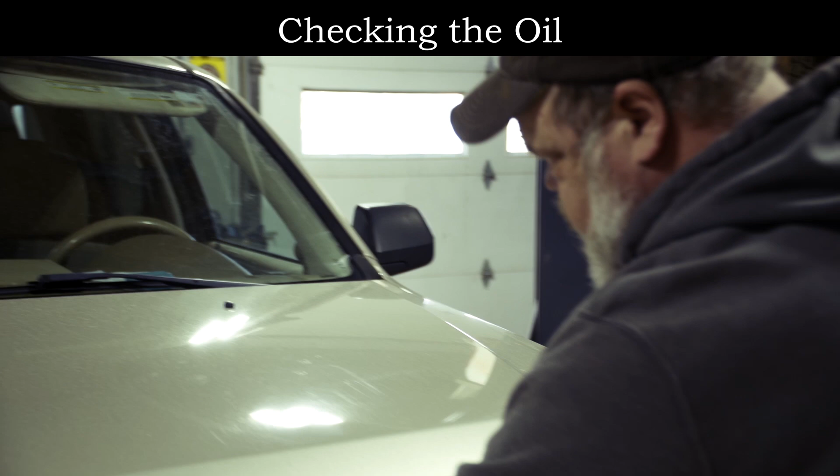Today we're going to check fluids on the vehicle. We're going to check engine oil, transmission fluid, brake fluid, antifreeze, and check the air in the tires. Then we'll go from there. Once you pop the hood release, underneath the hood they all have a release, so you can get the hood open and use the prop rod.

This is a 4-cylinder Ford, and almost all dipsticks have a yellow top. You look under the hood and most of them are yellow. Give it a good wipe, put it back in, pull it out a second time, and then you can read the oil level. This one here is just about on full, so engine oil is good in this car.

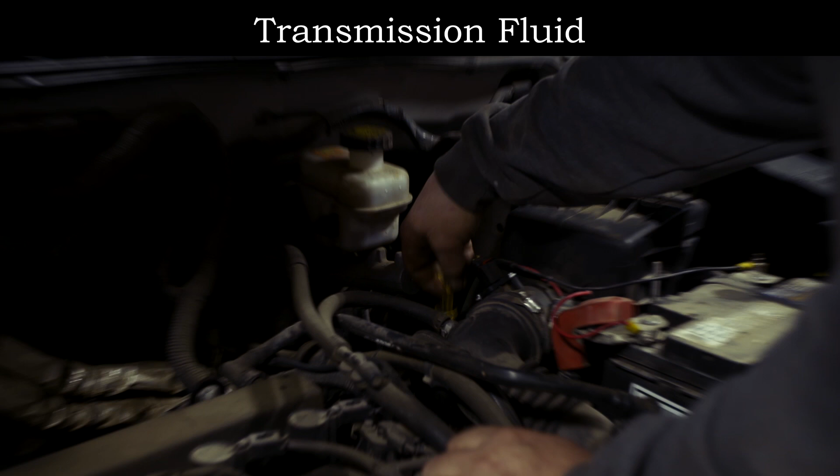Over here under another cap is washer fluid. They're always located under the hood. Back here will be your transmission fluid, on the driver's side towards the rear. Same idea, you pull it out and wipe it off. Most transmissions you have to have the car running when you check them, and you always dip it twice: first time to wipe it, second time to check it. You can see this one here is on the add mark, so we'll probably put some oil in that one.

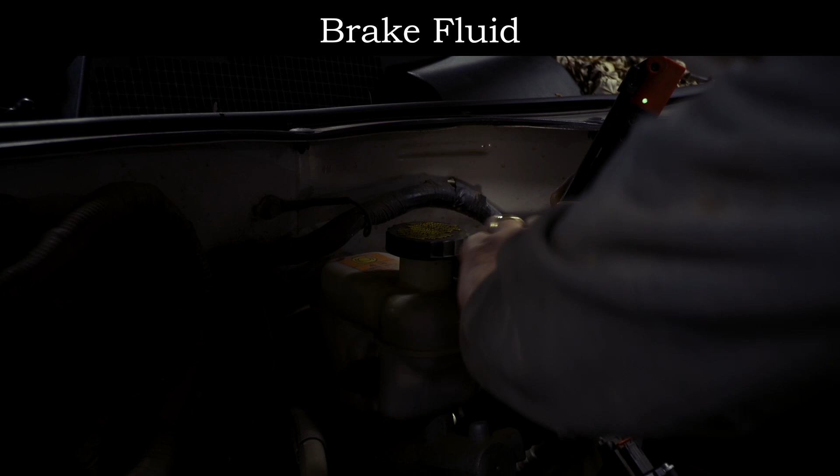With a tall reservoir on the back by the firewall, this is brake fluid. Most of the time you can see right through them, and with a little wiggle you can see that the fluid is right there, just on the full mark. That takes DOT 3 brake fluid on 99% of cars.

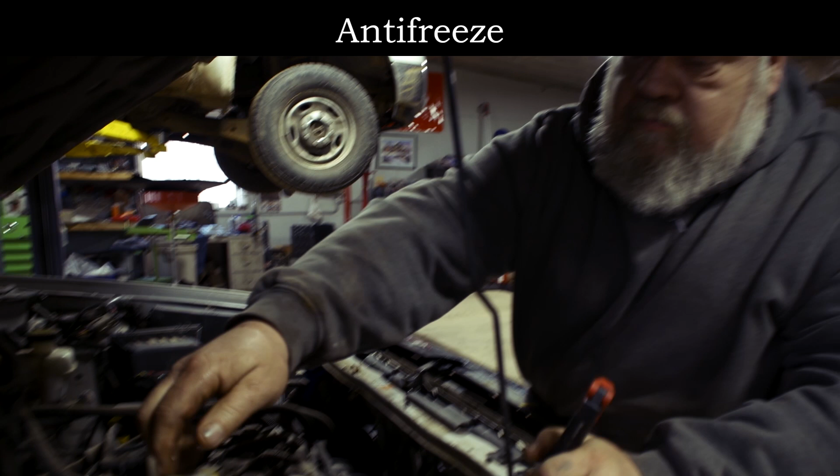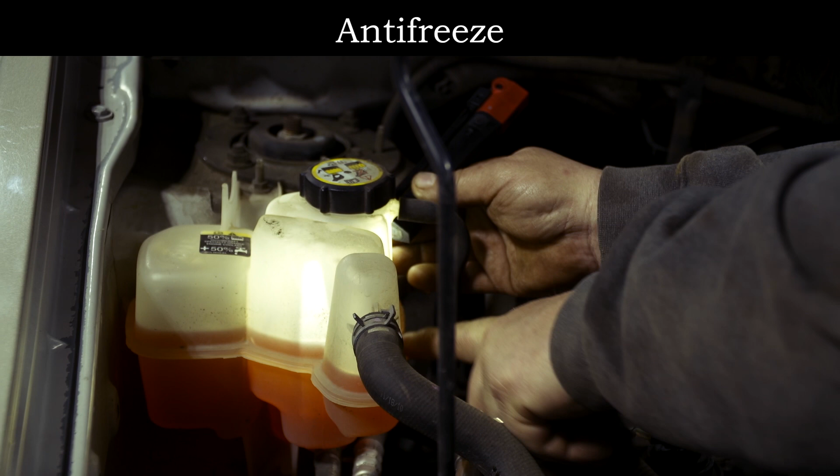Over here we have antifreeze, which is an antifreeze jug. You just take this lid off, pretty simple—always do it when the engine's cold. If you look through the side of it you can see where the level is. Give it a little wiggle, you can see it wiggles, and that's right on the full mark, so that's good to go. That's basically how you check your fluids in your vehicle.

Around this edge here it'll tell you the size of the tire, and over here it says PSI cold, which is rated on every tire. Most passenger car tires are 35 to 44 PSI. This one happens to be 51, but that's maximum pressure. If you look in the driver's door, it'll actually tell you what pressure to set the tires at—there'll be a tag inside the driver's door explaining what the tires are supposed to be. That's the recommended pressure for this vehicle.

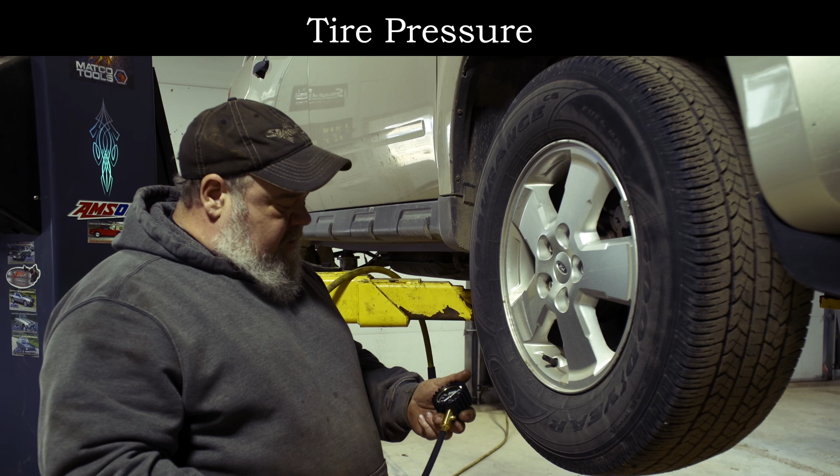So here we have a tire gauge, so we can check the air in the tires. Take the valve stem cover off, and then you can check the air in the tires that way. If you need air, most gas stations have an air chuck so you can put air inside of them, like that. When you're done, always put your valve stem cover back on.

Today we're going to look at our windshield wipers. If you have streaking or spots that aren't cleaning your windshield, you may need to replace them.

This is a common J-hook one, which is fairly simple to replace. There's a little clip here you press with your thumb and slide the windshield wiper blade off. The new one's going to go on the same way—just line this up through the slot and it will snap back into place.

You can test your windshield wipers and make sure they are working. They also will lock up into place like that. Sometimes if the weather's bad and you know snow's coming, you can raise them up like this, and it becomes much easier to clean your windshield off, and they won't be frozen down when you're ready to go.

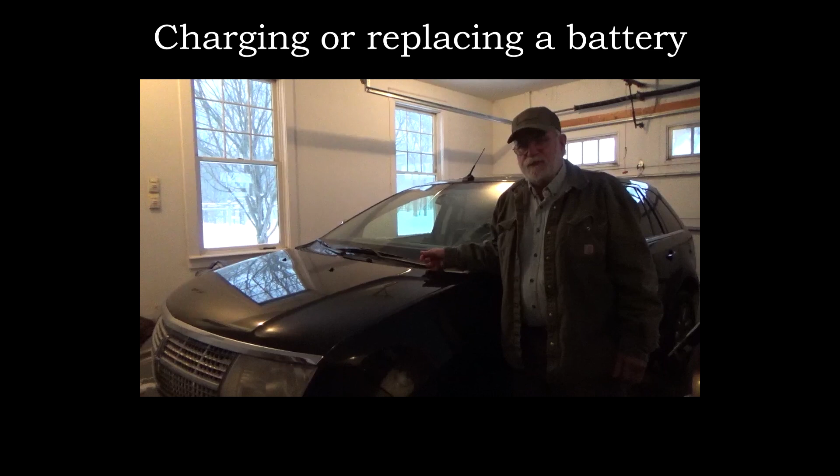One thing you may encounter is if your car won't start, it could possibly have a dead battery. We're going to show you how you can jump start your car from another vehicle. First you want to open the hood—most commonly the hood latch is going to be inside the driver's door.

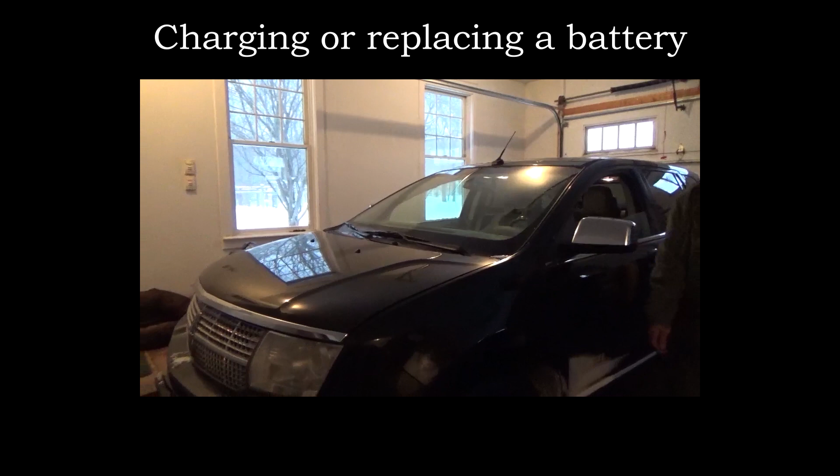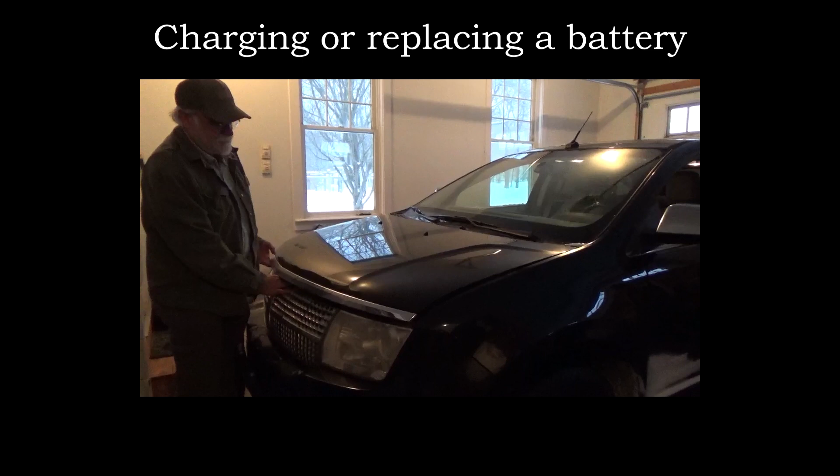There's a safety latch under the hood. You have to find and move it to one side or the other. Then you can lift the hood. There'll be a support - find the hole to put that in, and that will hold your hood up.

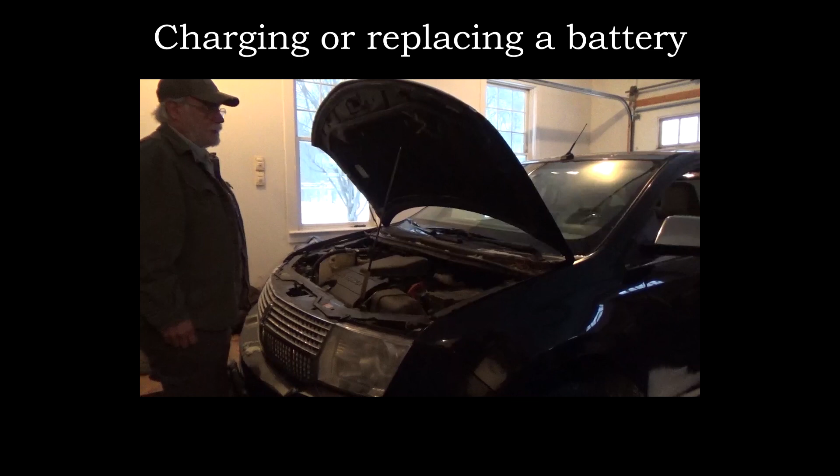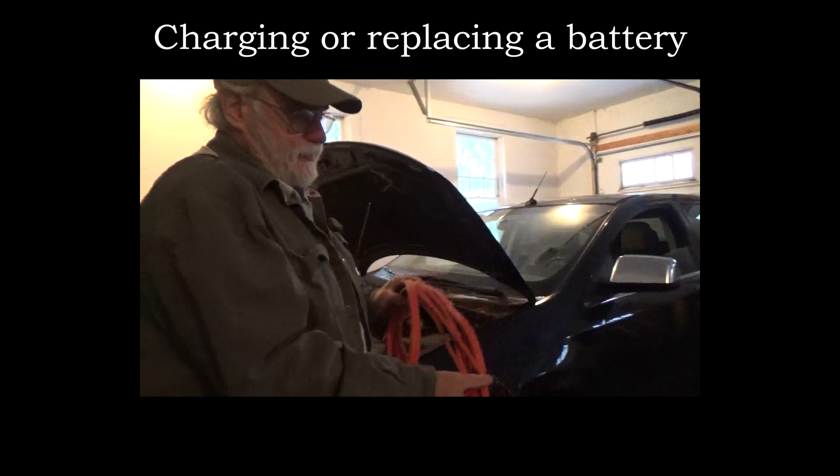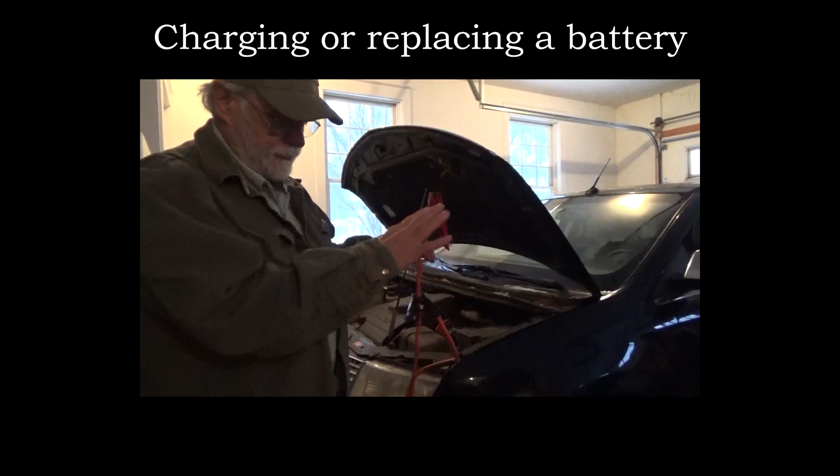Now you want to get your other vehicle that's running close to the car with the dead battery, and take your jumper cables. I like to get one end like this, so you don't want this end to touch. And on the vehicle that's running...

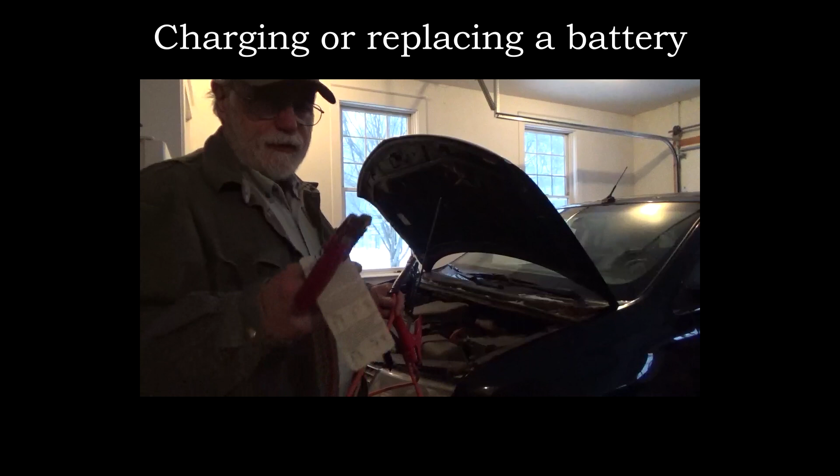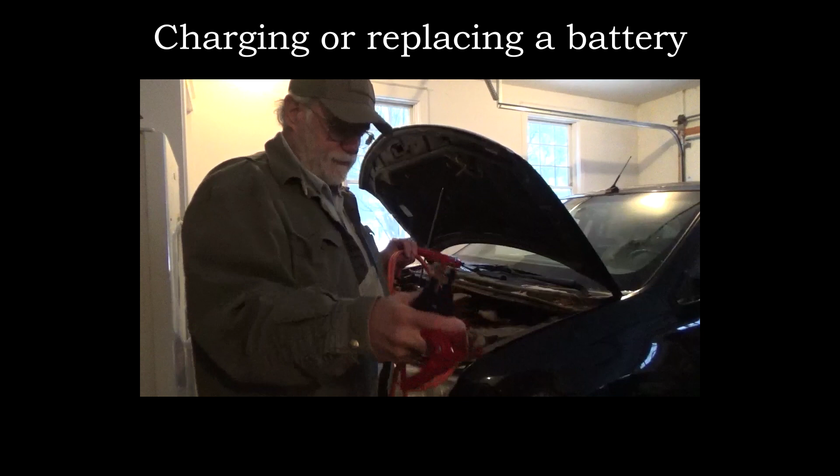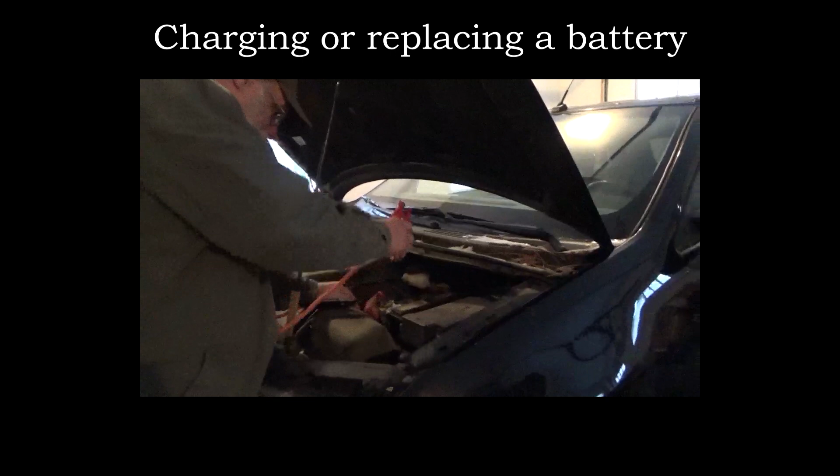You want to take the red cable and hook it up to the positive of the battery, which is most commonly red, and the black one hook up to the negative terminal on the battery. Then, being careful these don't touch anything, take the red cable and hook it up to the battery that has the red indicator on it. Now the black one on the vehicle with the dead battery - you don't want to hook it to the battery because it can spark, and we don't want sparks near a dead battery.

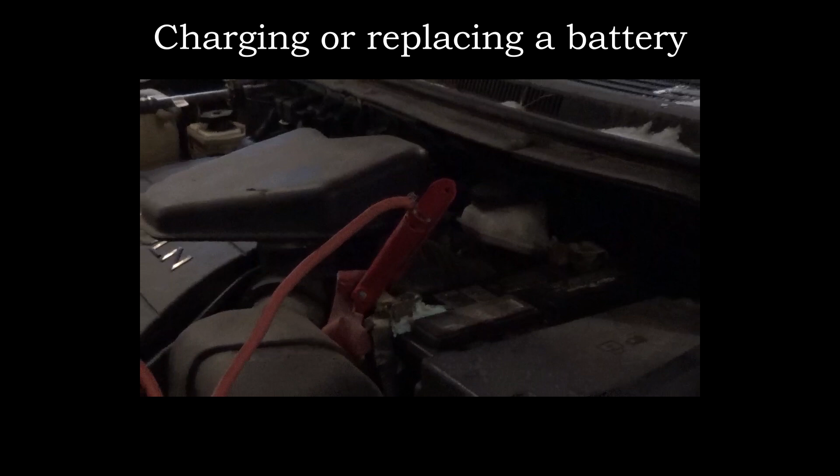So the best way to do the black one is to find a metal object on the car where you can hook it to that. It's going to spark when you hook it up, and we don't want the sparks near the battery. So on the car with the dead battery, you only want the positive or the red cable hooked up. The black one goes to a metal object on the car.

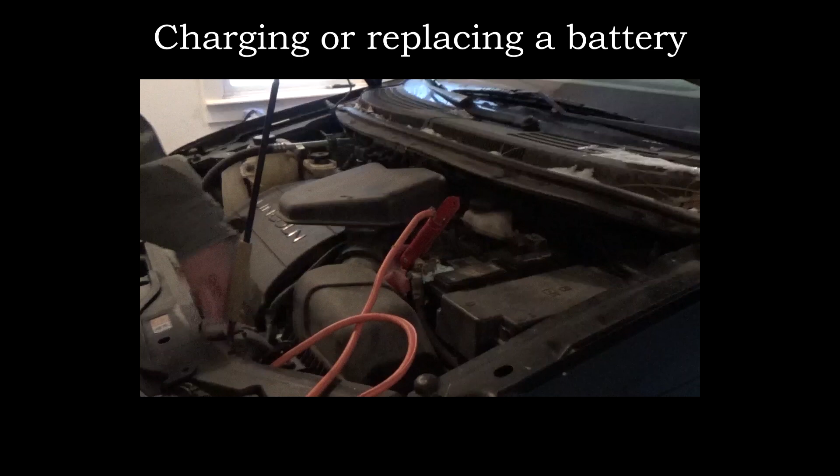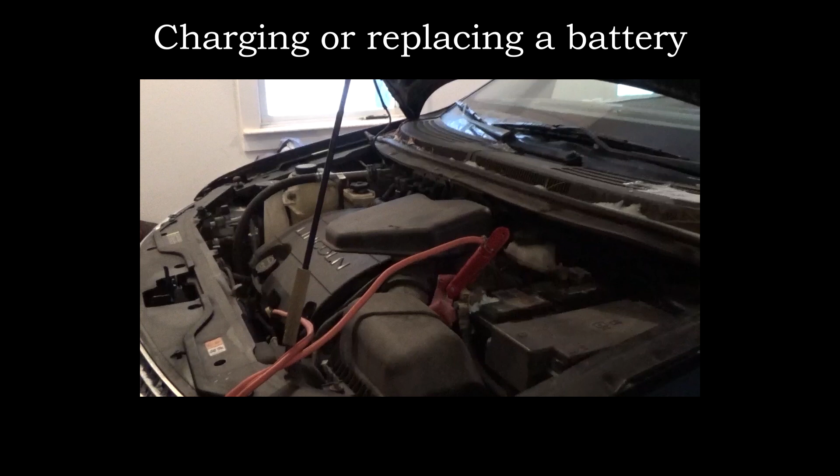This one I went to the radiator support. A lot of vehicles have a hook here where a mechanic would use to pull the engine, and that's always a good spot to hook it up as well, just to a good solid metal ground. And sometimes you can try the vehicle - sometimes it takes a few minutes though. You have to let it charge from the good car for 5 or 10 minutes sometimes, and then your car will start.

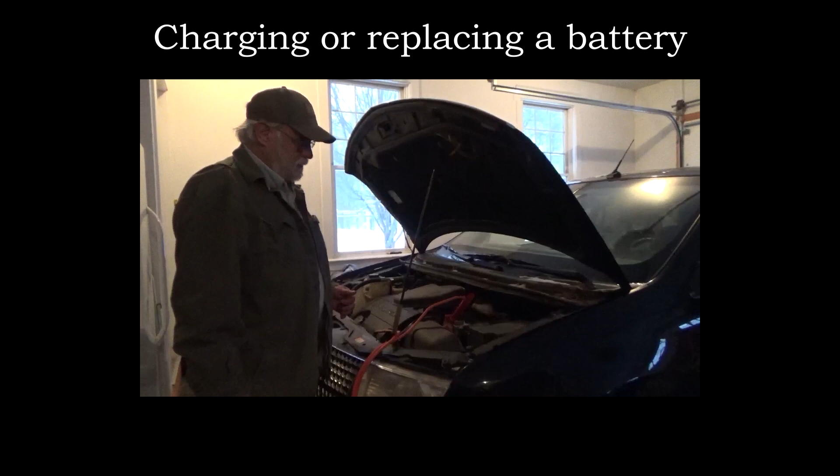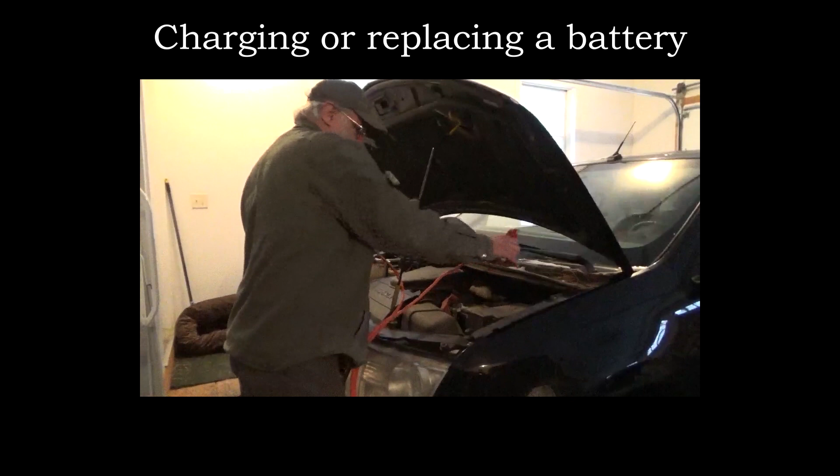The process for disconnecting is the same. Do the black one first, then the red one, and just prevent them from touching together till you get the cables disconnected off the other vehicle.

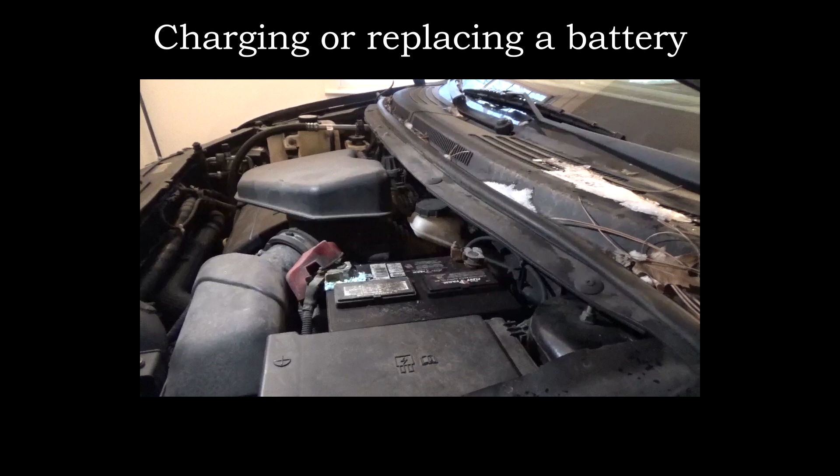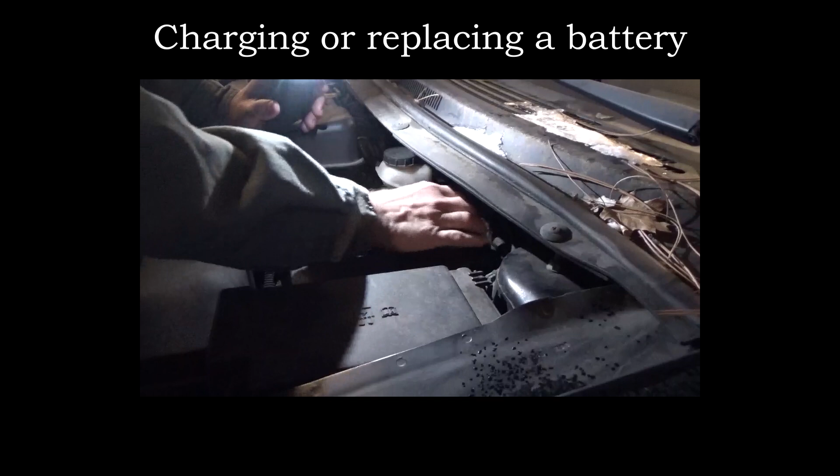So you may encounter, if your vehicle won't start, that your battery may have actually gone bad. So if you're going to get a replacement battery, here's your terminals here that you have to loosen. You have to loosen these screws, and you may need to take a pair of pliers and wiggle these back and forth to get them off. This is a very common problem here, this corrosion around a battery, and that really needs to be cleaned off. You can actually just use Coca-Cola and pour it on there, and it will clean that corrosion right off.

A lot of batteries have a clip, which is right here. This clip is the battery hold down - you just take this bolt out, and that plastic wedge will come out of there, and then you have your cables disconnected. You can lift the battery straight up and out, and then just reverse the procedure for the new one. It will fit in there. Put your wedge back in with the bolt, and then try to clean your cables as best you can and hook those back up.

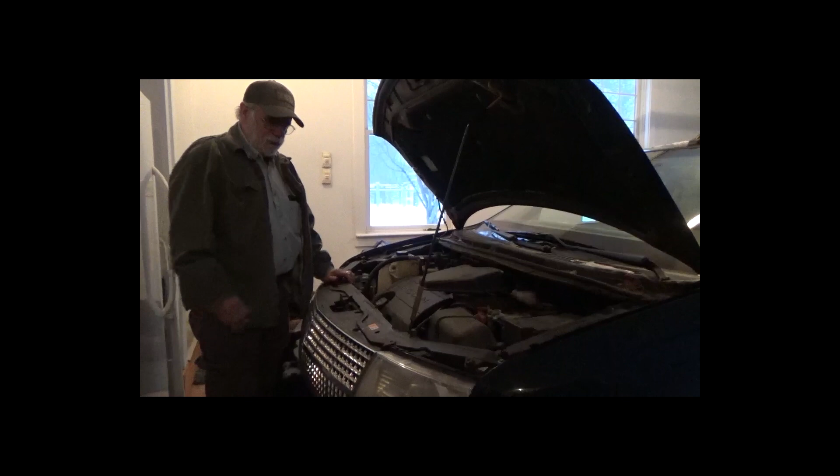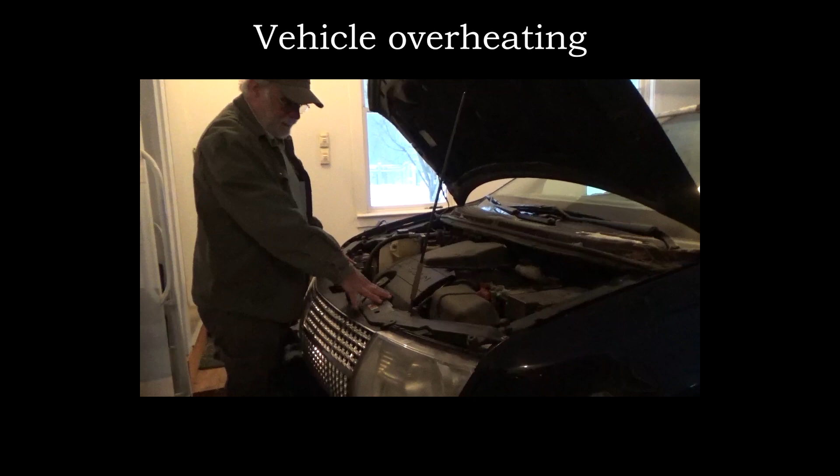So another problem you might encounter is if your car is overheating - your cooling system may not be working. The radiator is tucked in here behind the grill, and then there's electric fans on there that run to keep your car engine cool. That may require a mechanic to figure all that stuff out.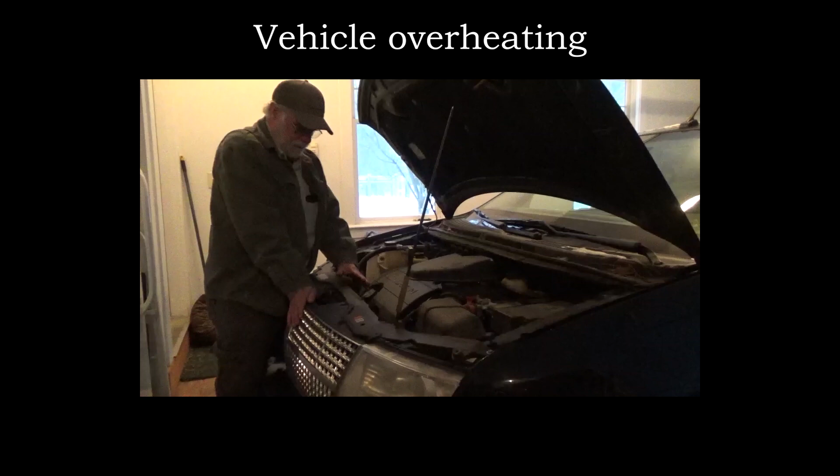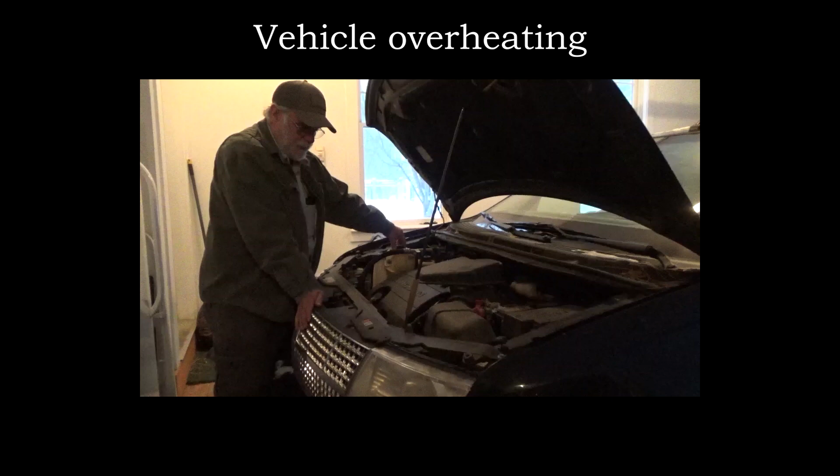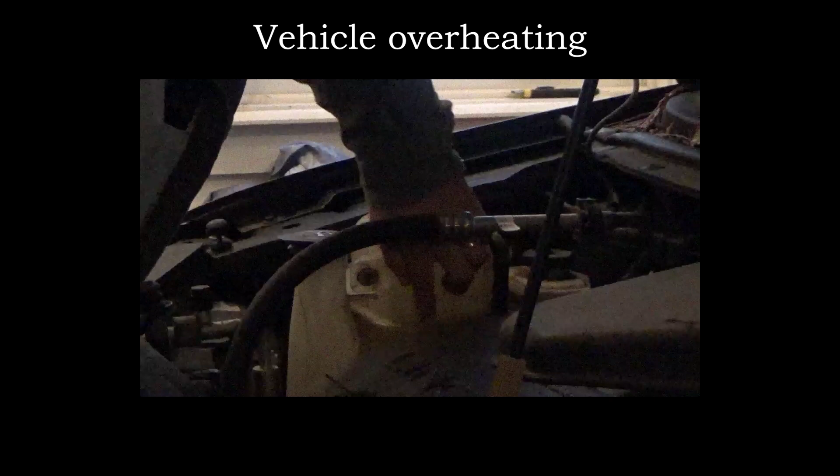But one common problem, if you're low on coolant, even though the radiator's here, most vehicles have a plastic tank off to the side that is where you check your antifreeze at. This is a pressure cap, so you don't ever want to take this off when the vehicle's hot - I'm going to take it off after there's been time for cooling. You'll always see a line that says minimum level and maximum level on this tank, and this is where you want to add antifreeze if it's low or empty.

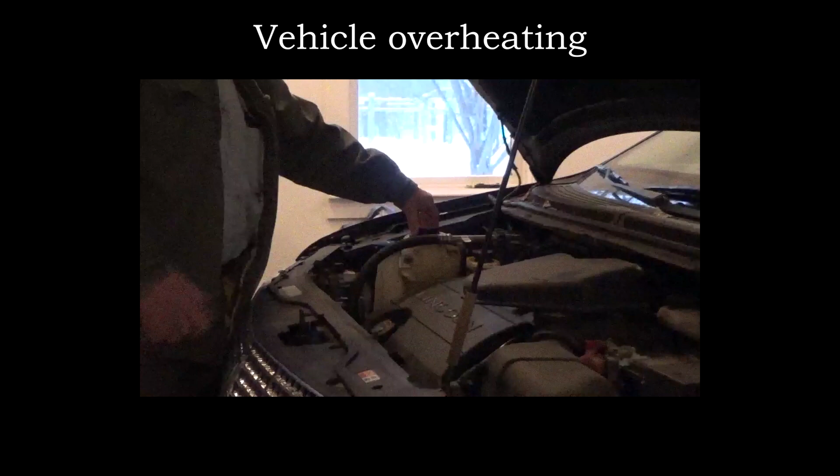You don't ever want to try to access the radiator. This is where you add it, and then screw this cap back on, and it will ratchet lock into place again.

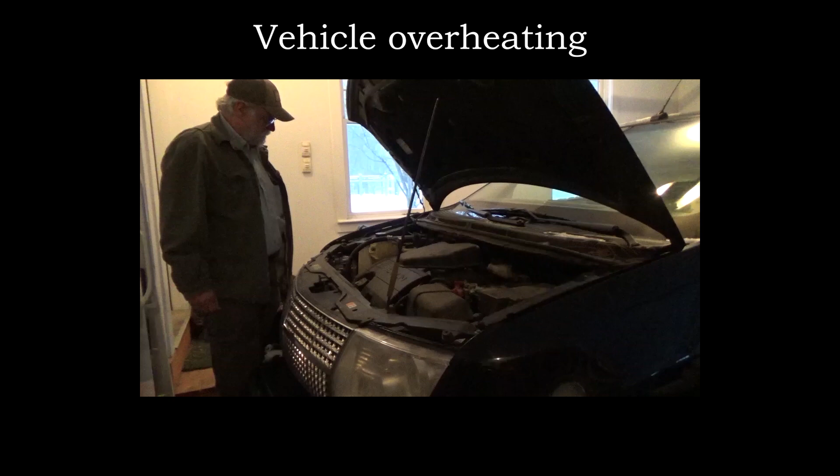So if you get a flat tire, you're going to have to attempt to change it where you're at. Most vehicles, in the back underneath, you're going to find the spare tire. It's located here.

It may or may not be the same size as your tire. It might be smaller, that's just for an emergency to get you off the road or to where you can get the tire repaired. So this one here, we're going to unscrew this piece here, holds the tire down.

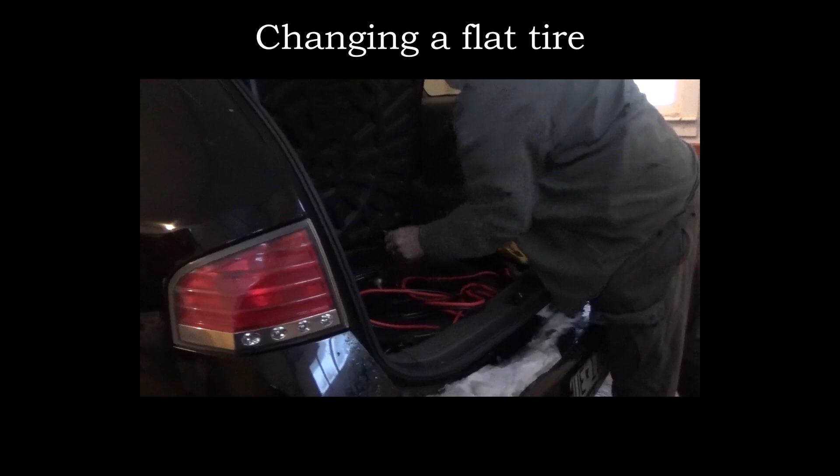Then this piece also, and you can rip this tire out, and this is going to be your spare, and you can see it's a different size than the vehicle's regular tire. It's smaller.

It's most likely going to have a reduced speed rating on the tire that recommends 30 or 40 miles an hour. It's just to get you on the road again until you can get your tire repaired. So that's what most spares look like, they're usually smaller.

So in here I keep my jumper cables back here as well, so I always know there's a set with the vehicle. But most of the time under the tire you're going to find your toolkit to be able to jack the vehicle up and change the tire.

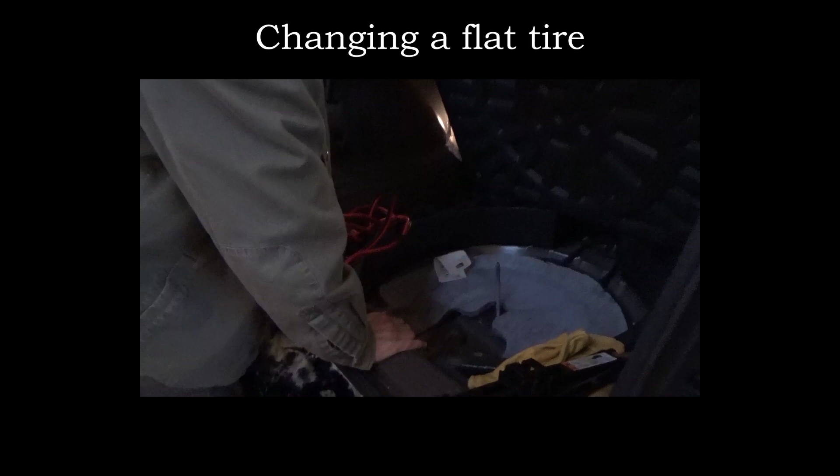This is what the jack is going to look like. So you have your jack and your jack handle. This will go under in front of the back tire if you're changing, or behind the front tire.

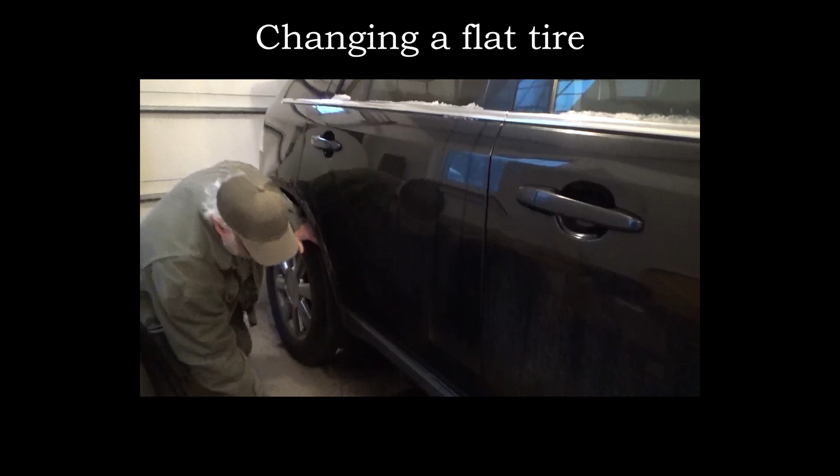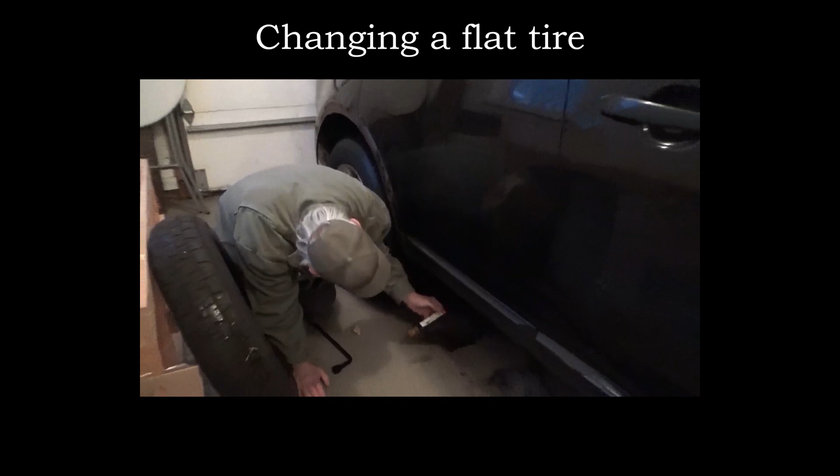There'll be a little groove in the bottom of the car that this fits into, and then you'll be able to turn this up a ways by hand, to get the jack in place in the groove under the vehicle, and just snug it up so it doesn't move.

Then before you raise the vehicle, you want to loosen the lug nuts on the tire, and most of these have a little pry bar in the end which you can pop the hubcap off. Then you just want to loosen these lug nuts counterclockwise to loosen them. Don't want to take them off yet, but just loosen them up while the weight of the vehicle is on the tire.

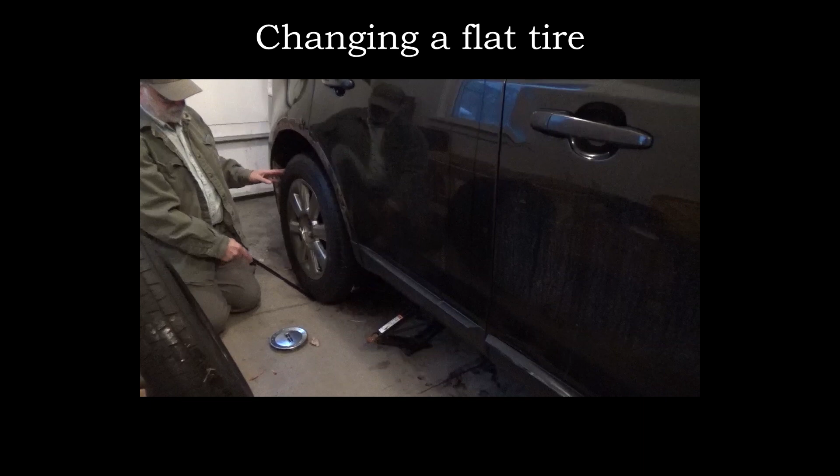Otherwise the tire is going to spin and you won't be able to get them loose. So once you have all those loosened, then this end also fits the jack. You raise the vehicle till the tire is off the ground. Then finish removing the lug nuts all the way.

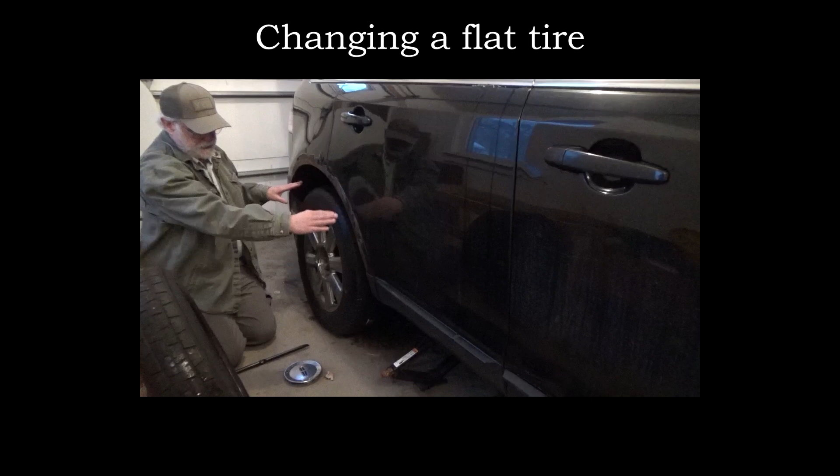Don't ever put your hands above the tire here, because if it falls off the jack, you don't want to get your hand or arm caught. Always grab the tire from the right and left side to remove it.

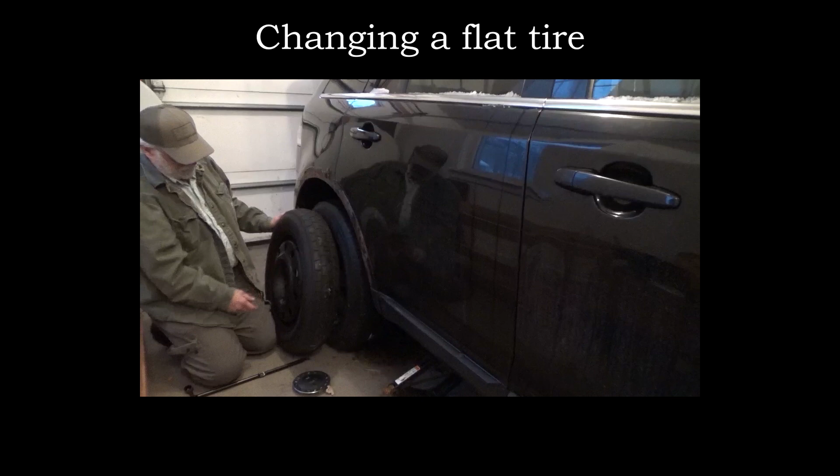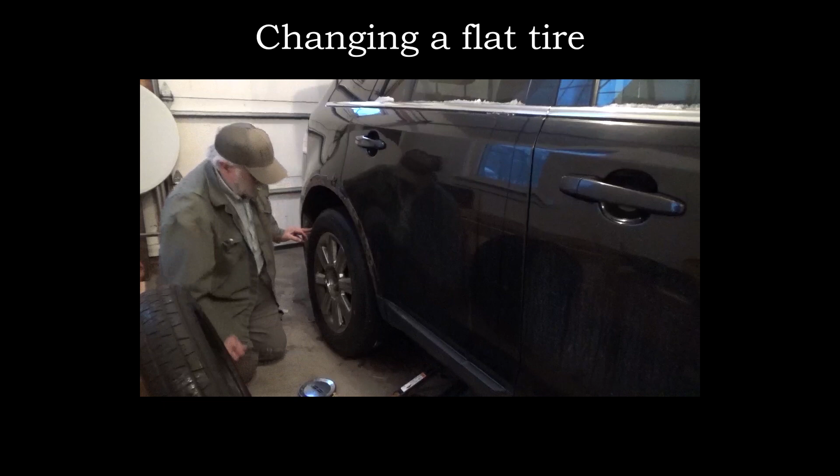Then you can roll your spare into place, line it up on the bolts, tighten the bolts down snug, lower your jack back down, and then you can finish tightening all the bolts once the weight of the vehicle is back on the ground.

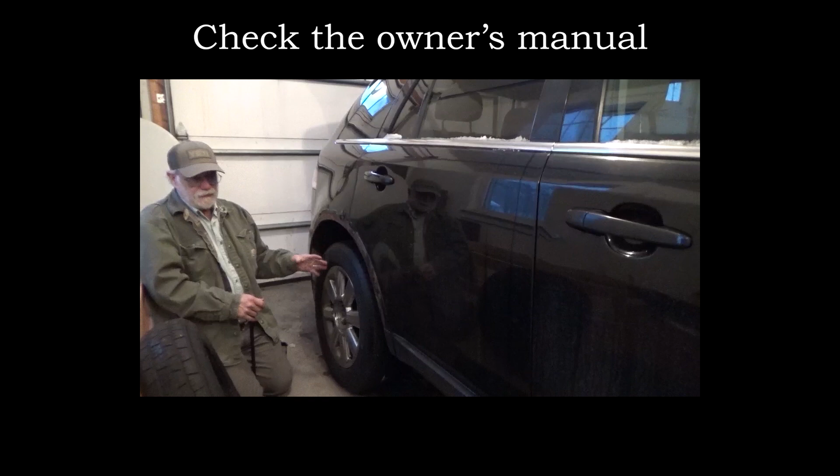You can always refer to the owner's manual in each vehicle, because every vehicle is going to have just slight differences from this one, but the basics are all the same. And that should get you back on the road with your spare on.

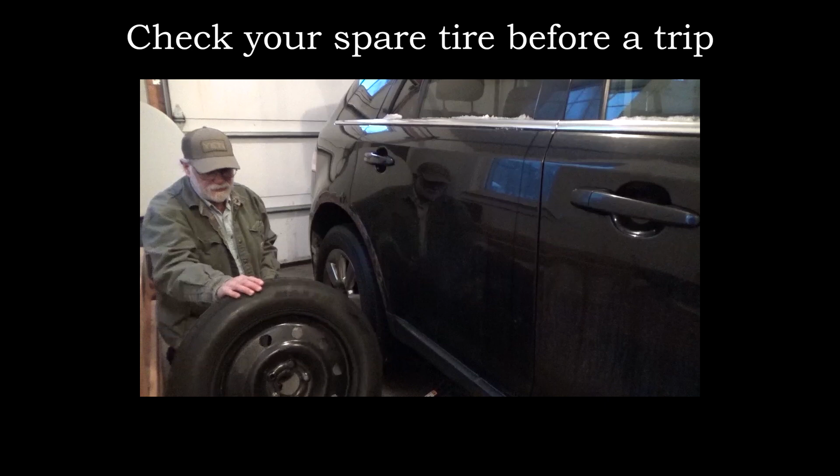And you always want to check your spare several times a year, especially if you're going to go on a trip. Just check the pressure in it, because it won't be of any help to you if it's flat.

Another reminder I wanted to give you is there's a lot of good information in your owner's manual. If you refer to that, it's going to tell you how to change the tire on your specific vehicle. Inside the driver's door, it will give you tire size and tire pressure.

And if you're out there and you encounter a problem, just don't be afraid to call for help as well. And we just want to keep you safe out on the road. Thanks.